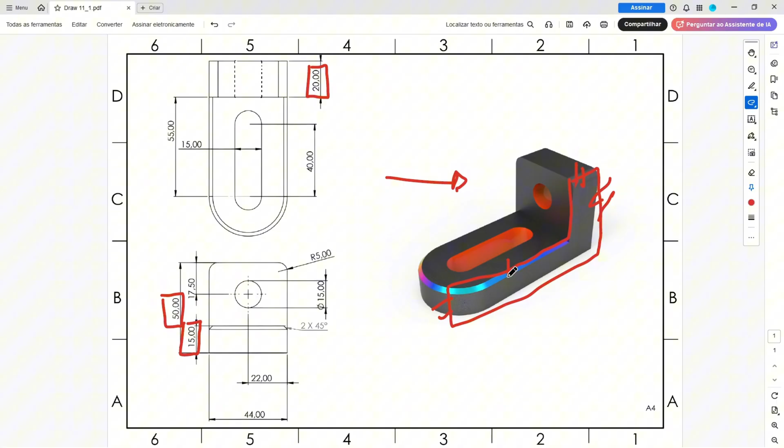We have the dimensions here. This line has 50 millimeters of length, this line has 15 millimeters, this line has 20 millimeters, and this line has 55 plus the radius here, that is 22 millimeters, so it is 77 millimeters.

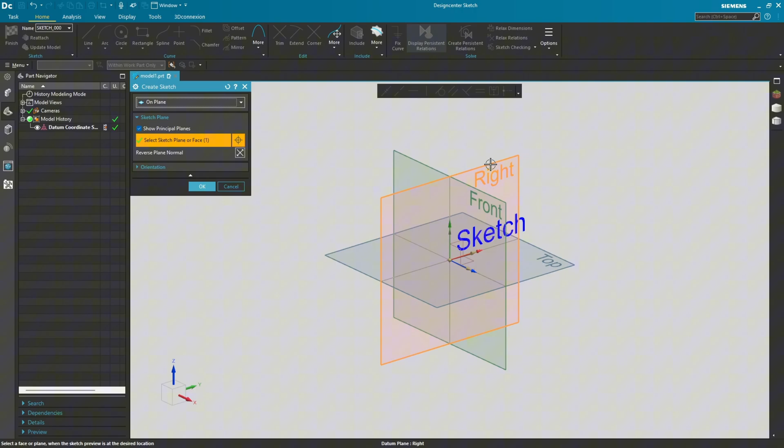So let's create this in the right plane. Go to create a sketch and select the right plane. Select the line, click here on this point. I will make the sketch and put the dimensions later.

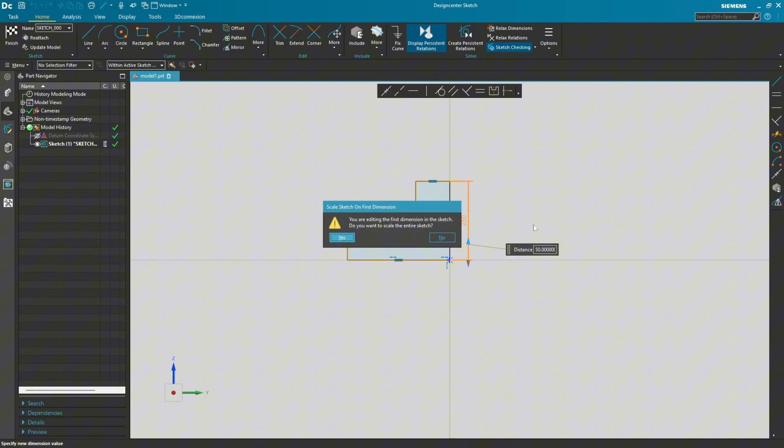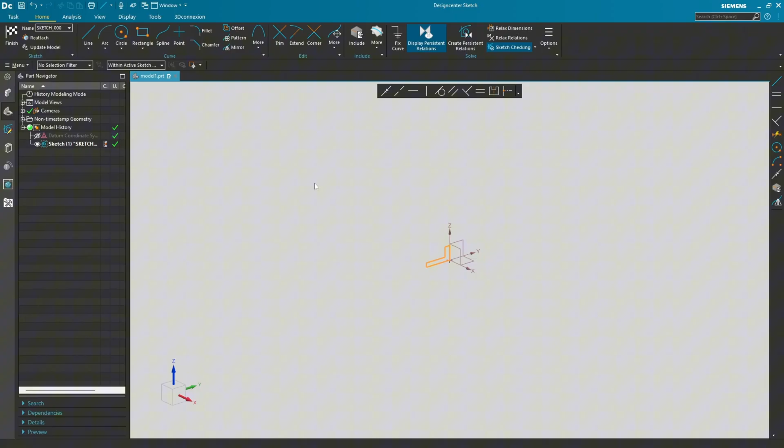This line here has 50 millimeters, this line has 20 millimeters, 77 millimeters here, and 15 millimeters here. Finish the sketch. Now we need to extrude this, and we will extrude this 44 millimeters.

Go to extrude, start here, select symmetric, and the distance is 44 millimeters, and press OK. You can hide the sketch.

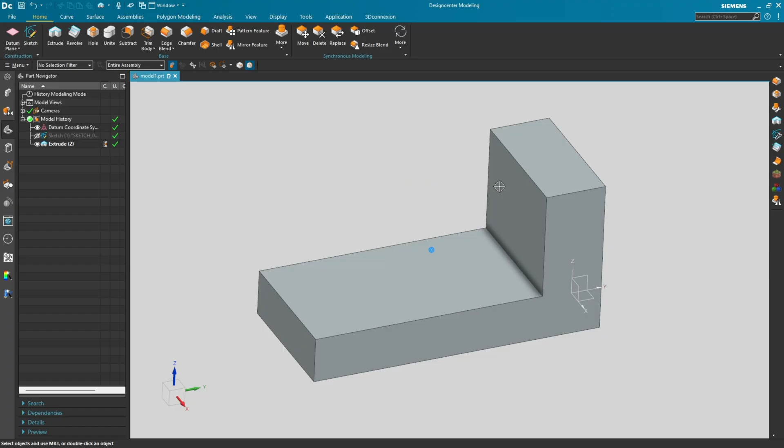Now we will create the fillets in this edge here and in this edge. The fillet here is 5 millimeters, and in this edge here we have a full round fillet, this one.

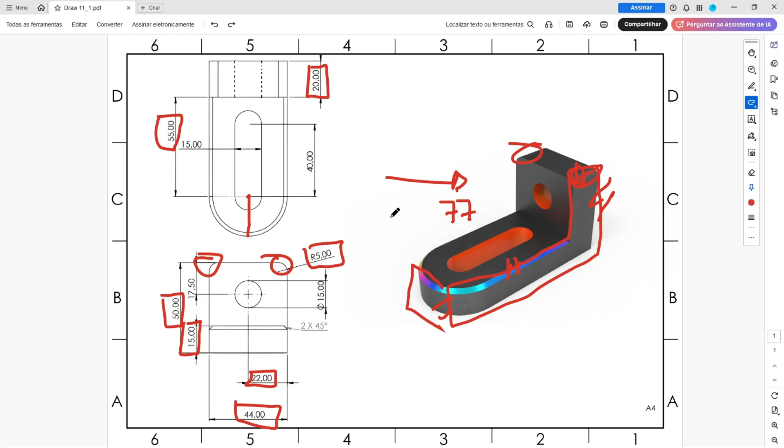So let's create this. Go to Edge Blend and select this edge and this edge, and the fillet here is 5 millimeters of radius, and press OK.

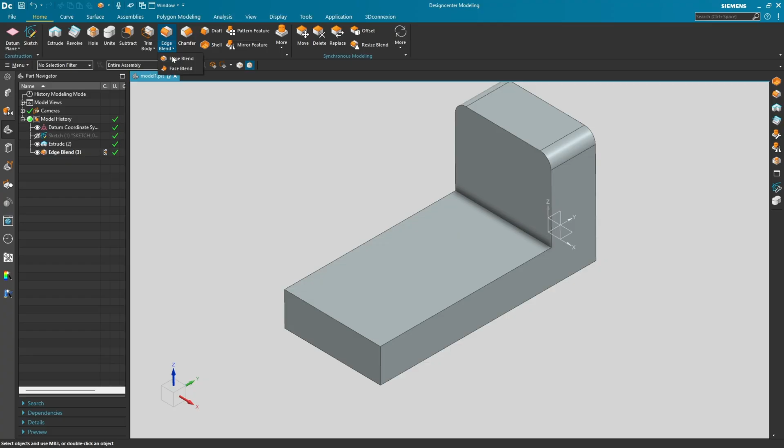Now we will create the full round fillet. So to create this, go to Edge Blend and select Face Blend. Here, select single face to select a single face, and here select 3 faces.

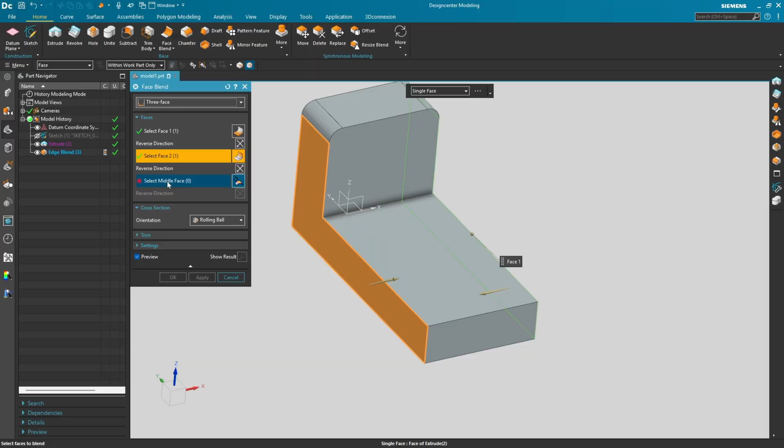Face 1, select this. Face 2, select this face. And the middle face, select this one. You will make this fillet here and press OK.

Now we will create this slot. This slot has 40 millimeters by 15, and we need to make a cut here through all this body.

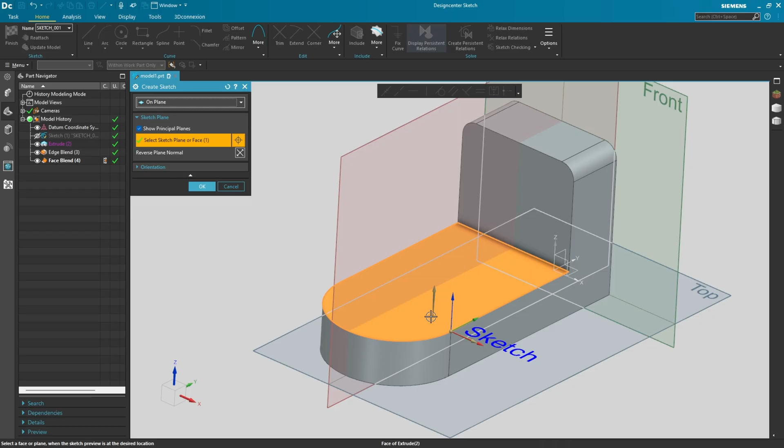So now go to create a sketch and select this face. Here go to include and select this arc here, press OK. And now we will make a slot here.

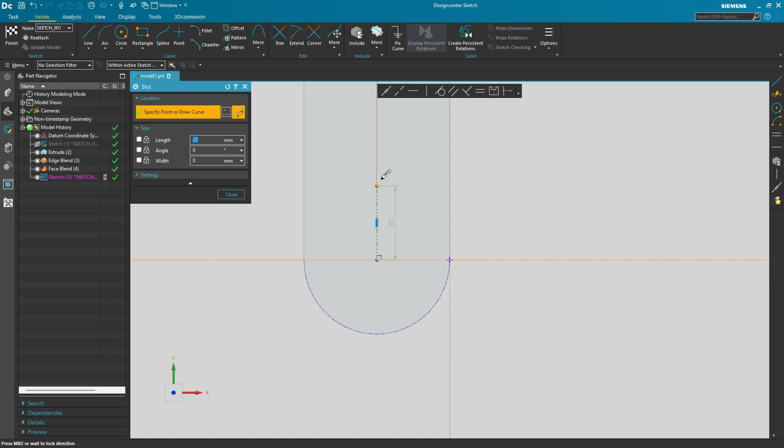So go to more and select slot. And here we will find this point here. Make a slot here, we'll put the dimensions, okay.

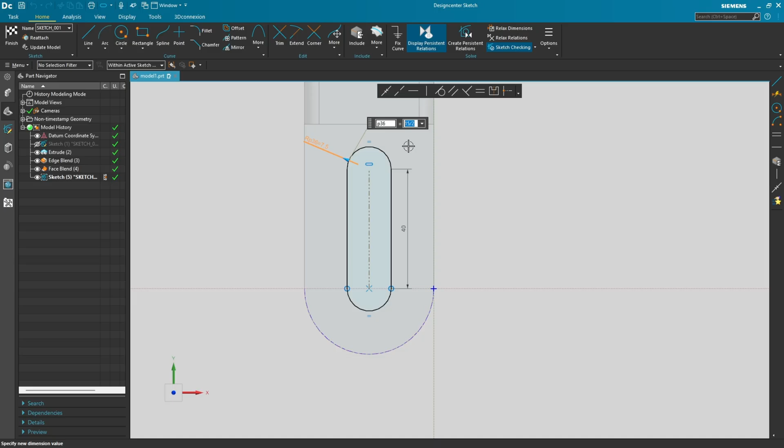The distance here is 40 millimeters, and the radius here will be 15 divided by 2. And here make sure that this point here is coincident with the center of this arc.

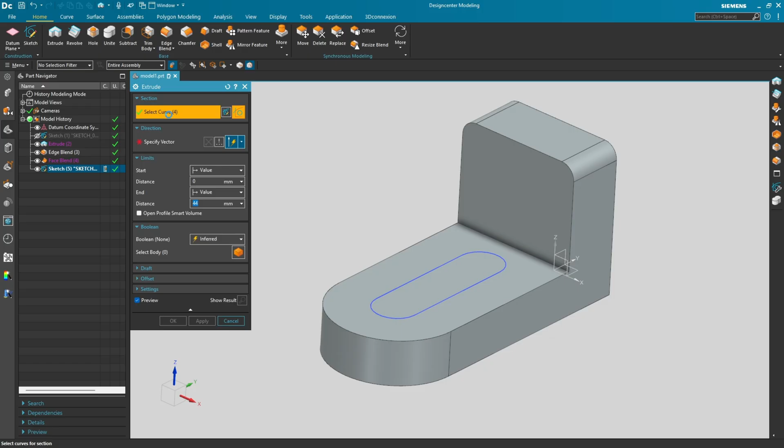Now finish the sketch and go to extrude. Start here, select through all, and the operation here, select subtract, and press OK. Hide the sketch.

We need to create this hole here with 15 millimeters of diameter. And the distance between the center of this hole and this edge here is 17.5.

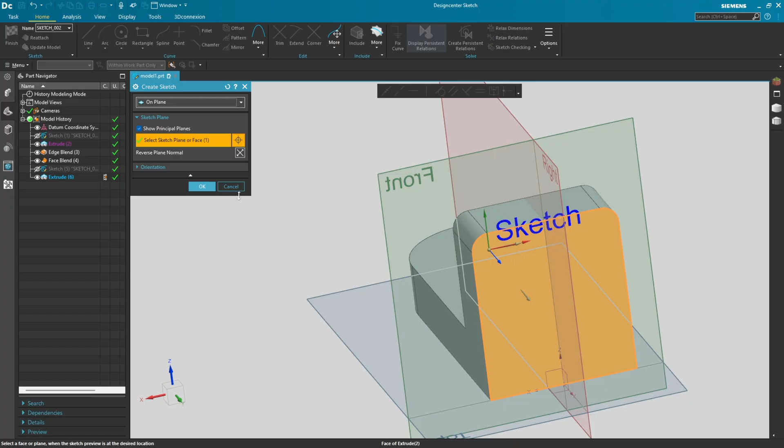So go to create a sketch, and here I will select the back face and press OK. Select a circle, make a circle here. This circle has 15 millimeters of diameter.

And go to include, select this edge here, or select only the center of this edge. Move the mouse here and select the center point here and press OK.

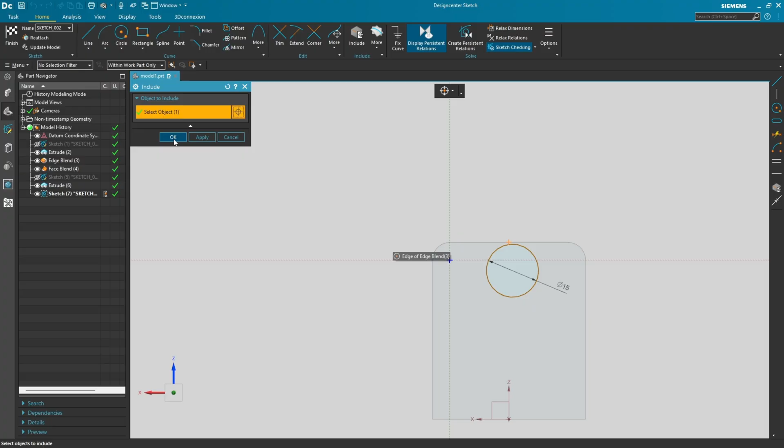Now select this point and select the center of the circle. And the distance here is 17.5 millimeters.

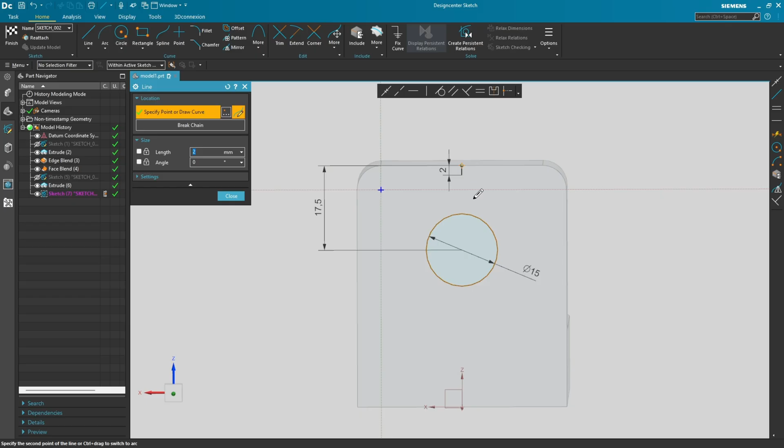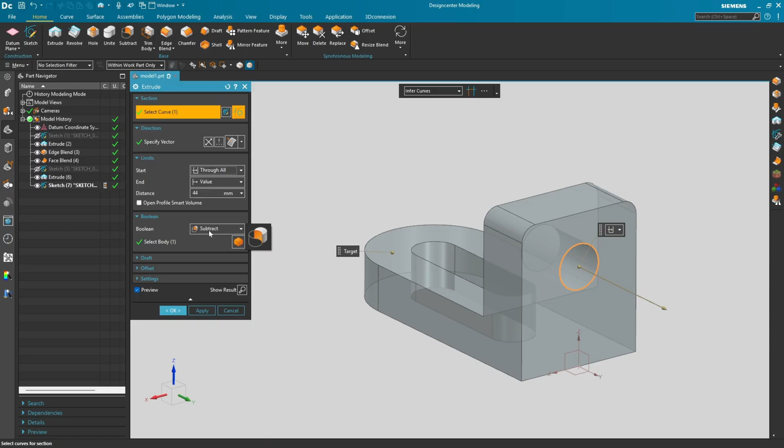And here let me make a construction line between this point and the center of this circle, and transform this to a construction geometry. Finish the sketch, go to extrude. Start here, select through all, operation subtract, and press OK.

And now to finish this, we need to create this chamfer with 2 millimeters. So go to chamfer, the distance is 2 millimeters, select this edge here, and press OK.